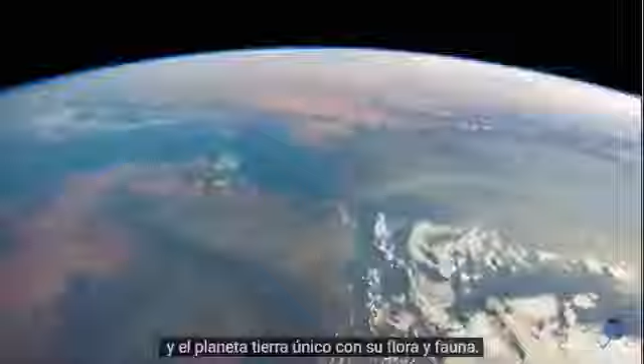People live on the beautiful and unique planet Earth with its flora and fauna. The intense activity of people on creation of welfare necessary for humans comes at huge energy consumption and leads to irreversible adverse ecological impact. Recently, humanity comes across such challenges as climate change, air pollution, water supply deficit, deforestation. These problems have a global nature.

Everyone uses electric energy. Where does it come from? Nowadays, more than 80% of energy is produced from non-renewable sources. My activity on developing the ways of generation of electric energy from wind energy application is directed at finding solutions for some of those challenges and problems of the modern world. This way is admitted to be the safest and the most forward-looking in comparison with others. It can have a positive impact on the development of energetics in future. Let's consider the main principles of the technology now.

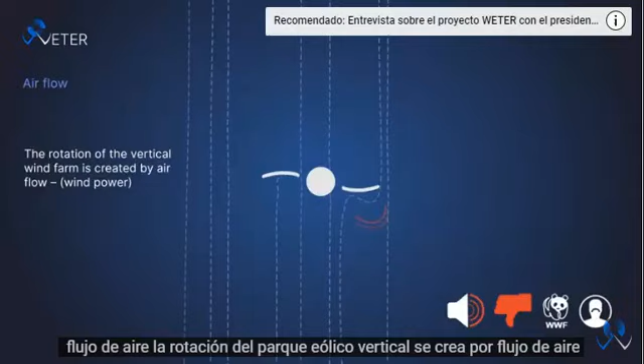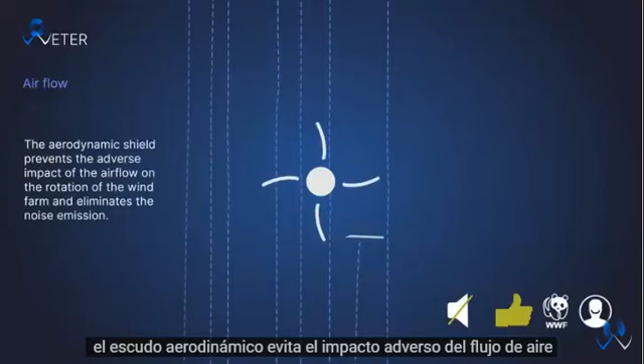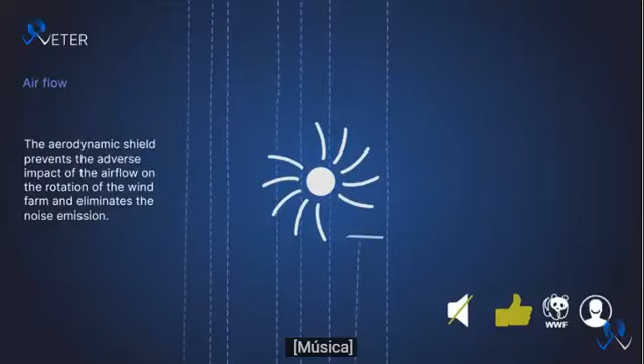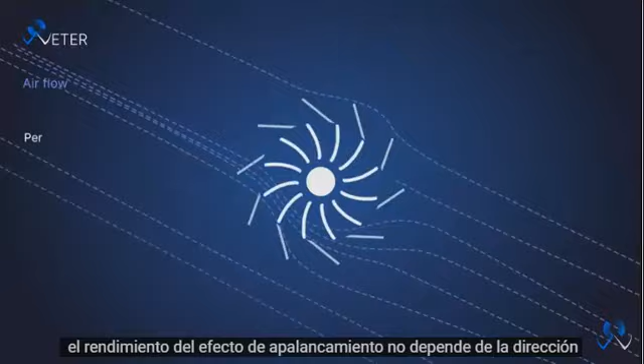Airflow. The rotation of the vertical wind farm is created by airflow, wind power. The aerodynamic shield prevents the adverse impact of the airflow on the rotation of the wind farm and eliminates the noise emission. The aerodynamic shield optimizes and directs air wind flows tangentially to the rotation circle, which increases the efficiency of the wind farm, the leverage effect. Performance doesn't depend on the direction of airflow.

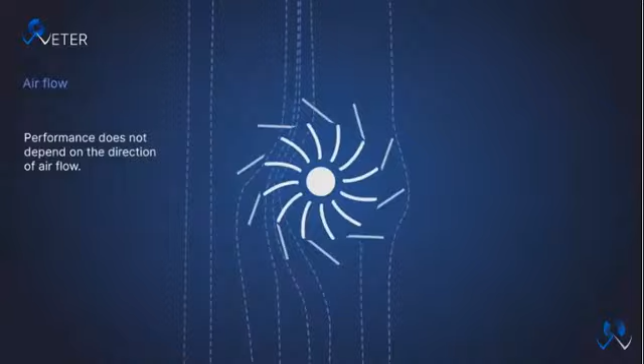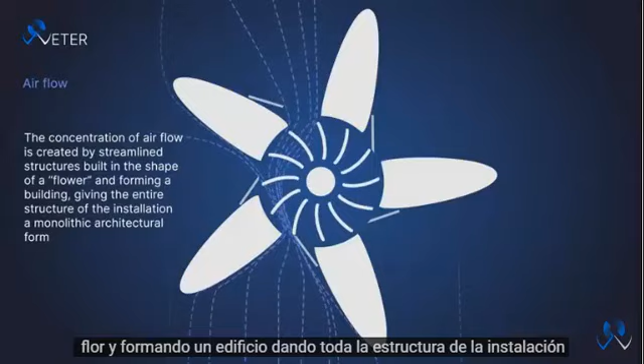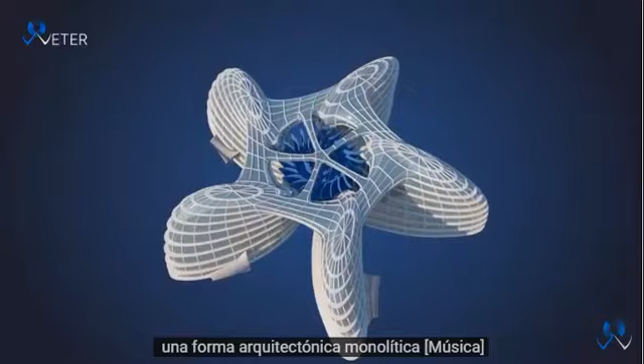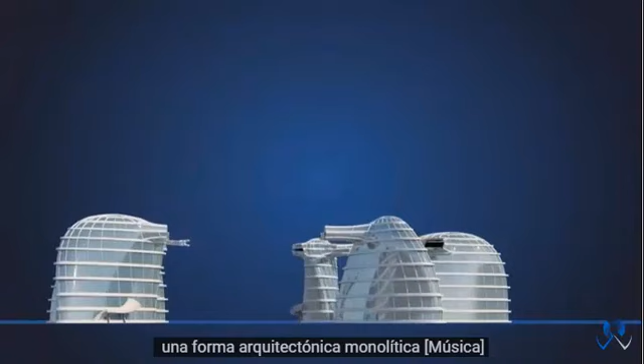The concentration of airflow is created by streamlined structures built in the shape of a flower and forming a building, giving the entire structure of the installation a monolithic architectural form. The cost of the wind energy complex will amount to no more than 4–6% of the building cost.

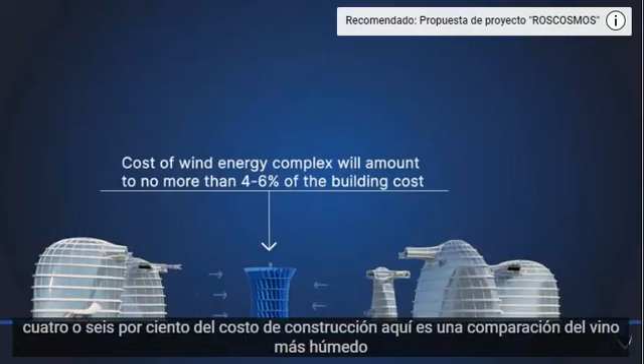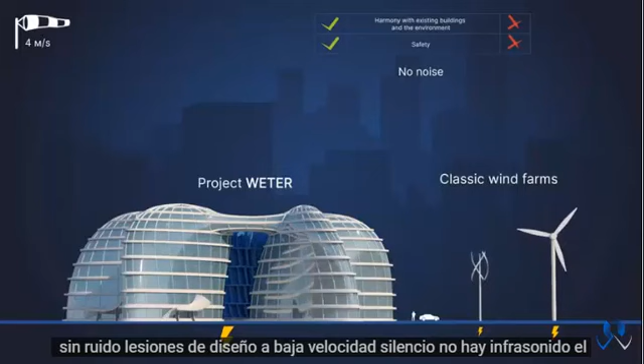Here is a comparison of the WETER wind farm with wind farms of the classic type. Harmony with existing buildings and the environment. The possibility of placement directly in an urban environment. There is no energy loss. Remoteness from inhabited places. Infrastructure costs. Losses of 7% of energy when transmitting over distances. Safety. No noise. Low-speed design ensures noiselessness. There is no infrasound. The presence of intense noise up to 70 dB and infrasound, which has an adverse impact on the nervous system of living creatures.

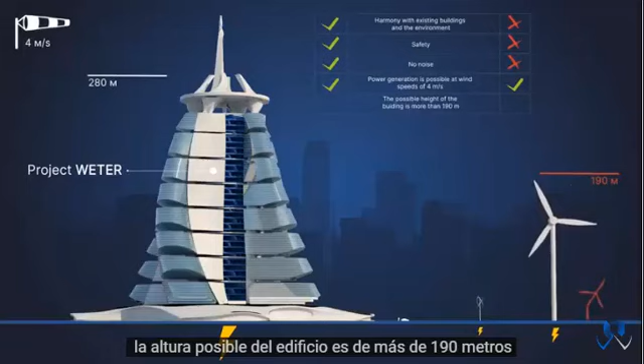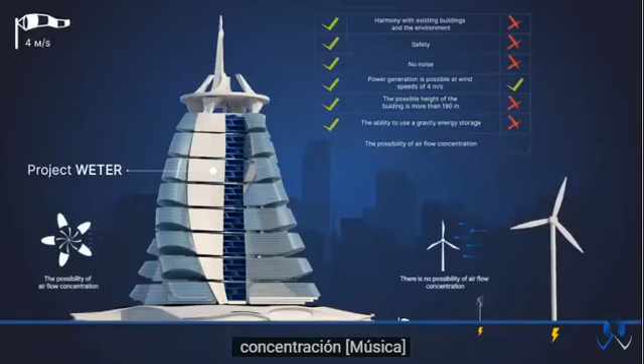Power generation is possible at wind speeds of 4 meters per second. The possible height of the building is more than 190 meters. The ability to use a gravity energy storage. The possibility of airflow concentration. The larger the area of the blades, the more energy.

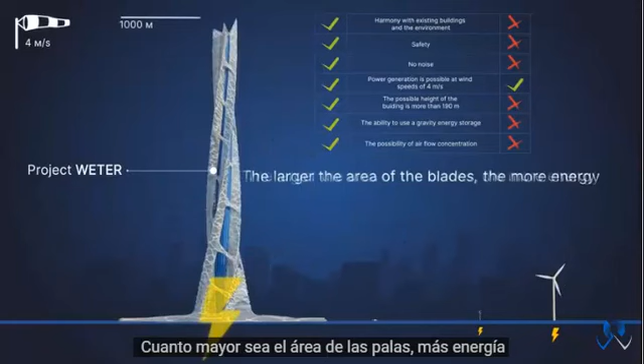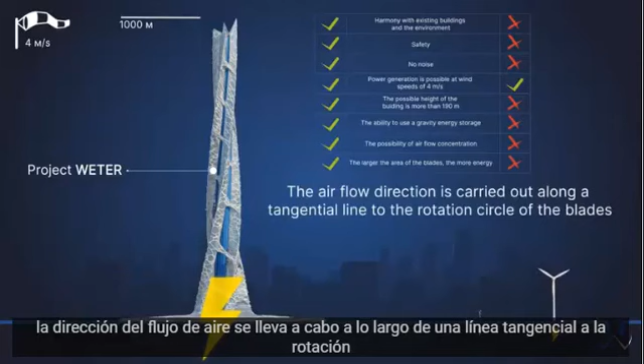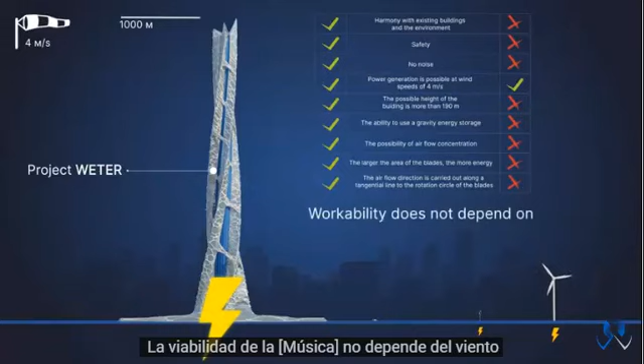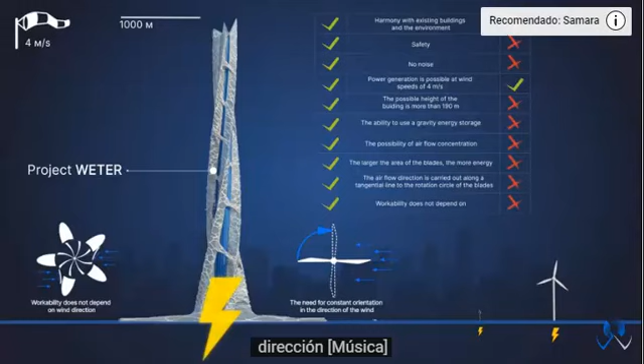The airflow direction is carried out along a tangential line to the rotation circle of the blades. Workability doesn't depend on wind direction. Speed of rotation is 4-7 revolutions per minute. Vibrations are excluded. Here are the application possibilities.

Is ready to make a step into the future. That expression of the experts of the International Forum Technoprom gave the start to the discussion. There is an analogous building, Pearl River Tower, in China, but they provide themselves with 10% of energy. We do 200.

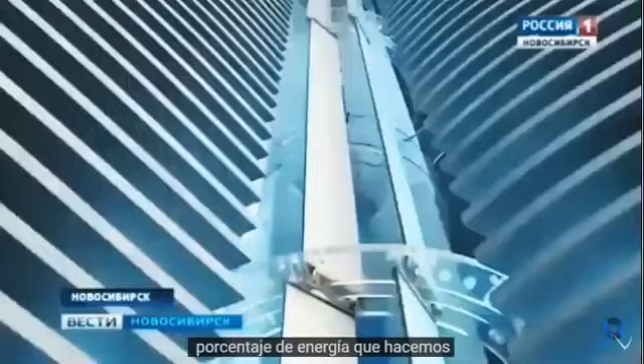It is a great discovery of yours. It needs developing. I think it is a forward-looking line of business. You will definitely get support of the experts who understand what it is and how it can be useful in urban construction, architecture, energy supply, in solving some global technical problems of the modern world. My congratulations, Denise.

There is an opening idea which is very good: to make a wind stream come inside, into the wind stream which flows around the building, which is constructed in a special way, so that wherever the wind blows from, the wind stream would get into the wind turbine. The rotation passes to the machines and the energy is generated. I am always excited to discuss interesting projects. Keep it up, that is my advice. Keep it up.

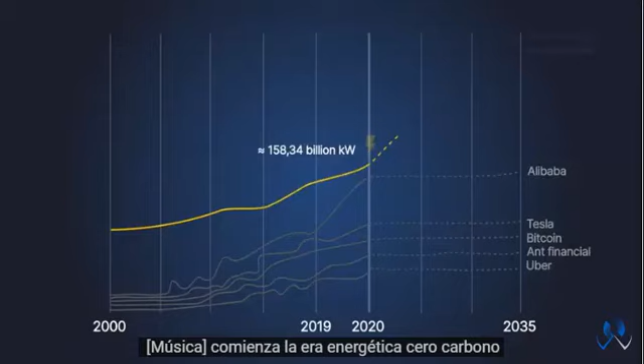The zero carbon energy era starts with the Veter Project.